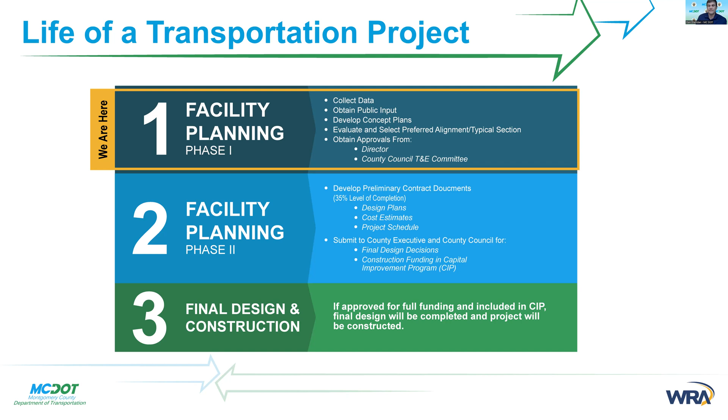We will present the following outline tonight, which includes project limits, project overview, purpose and need, and we will present conceptual design for the following three alternatives.

Alternative 1 is no build, no improvement to the old Columbia Pike and Prosperity Drive. Alternative 2 is improving intersections within the project limits, as well as adding sidewalk and side path along the road. Alternative 3 is intersection improvement, adding new sidewalk and side path, and opening the existing bridge to traffic.

Then we will talk about the project schedule, and lastly, we will finish with the question and answer session. Next slide, please.

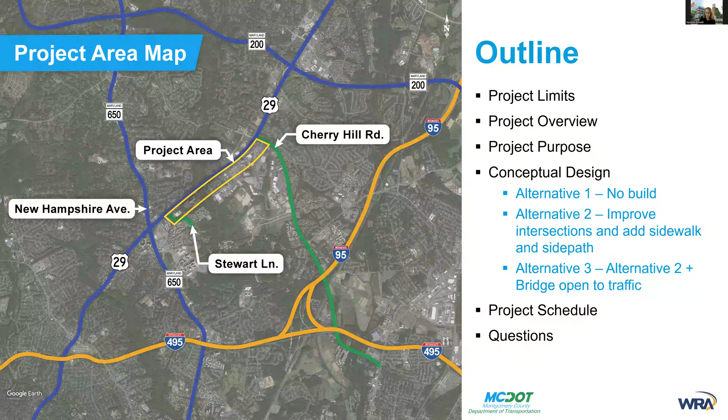Vicinity map. In this slide, highlighted in yellow shows Old Columbia Pike Prosperity Drive. The southern limit of the project starts from the intersection of Stewart Lane and Old Columbia Pike, and the northern limit intersects with Cherry Hill Road. Highlighted in blue is the existing arch bridge over the Paint Branch. We will discuss more about the bridge later in the presentation.

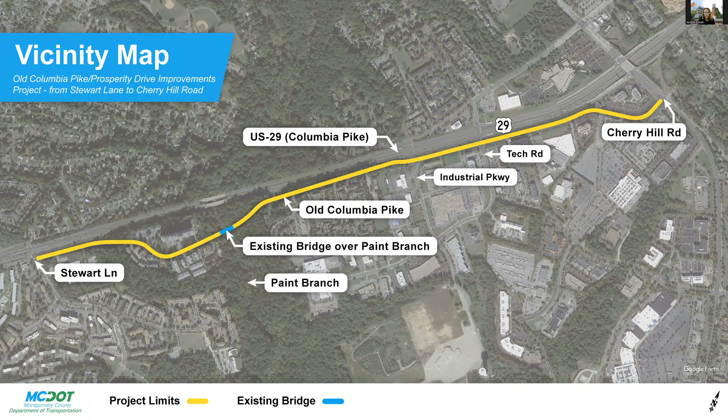Project overview background. Old Columbia Pike Prosperity Drive is about 1.8 miles long. The road from Stewart Lane to Tech Road is called Old Columbia Pike, and from Tech Road to Cherry Hill Road is called Prosperity Drive. There is an existing bridge over the Paint Branch.

There are 4 major intersections within the limit of the project. Beginning at the southern limit and traveling north, these intersections are Stewart Lane, Industrial Parkway, Tech Road, and Cherry Hill Road. This project is being closely coordinated with SHA's current intersection improvement project at US 29 and Stewart Lane, and it has been included in two master plans: the 1997 Fairland Master Plan and 2014 White Oak Science Gateway Master Plan.

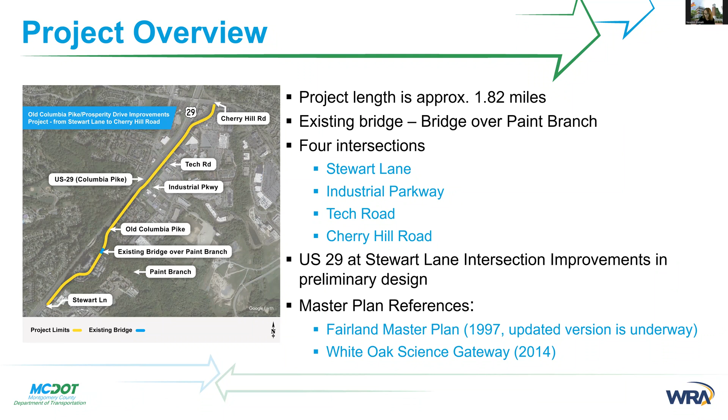So next up, project purpose. During facility planning phase 1, one really important item that we develop is what is the project's purpose. We can see a lot of items here. The two key ones that we've identified are connectivity and safety along the corridor.

Connectivity, because as you know, the bridge over Paint Branch is only open to pedestrians and bicyclists. As we heard earlier, and we'll see more of later, one of the options would be to reopen that to vehicular traffic. But even regardless of that, better connectivity for pedestrians and bicyclists is a big part of this study. Safety is another aspect.

Some of the intersections, for instance Industrial Parkway and Tech Road, are quite in close proximity to US 29. So we're definitely looking at safety concerns at those locations and elsewhere on the corridor. And then you can see the other items here.

We've talked about installing a side path, addressing drainage issues within the project limits, looking at existing traffic patterns, operations, and geometric deficiencies. We're also looking to enhance safety for pedestrians and bicyclists in keeping with the Montgomery County Vision Zero Action Plan, which is a plan to bring fatalities and injuries from vehicular, pedestrian, bicyclist incidents to zero.

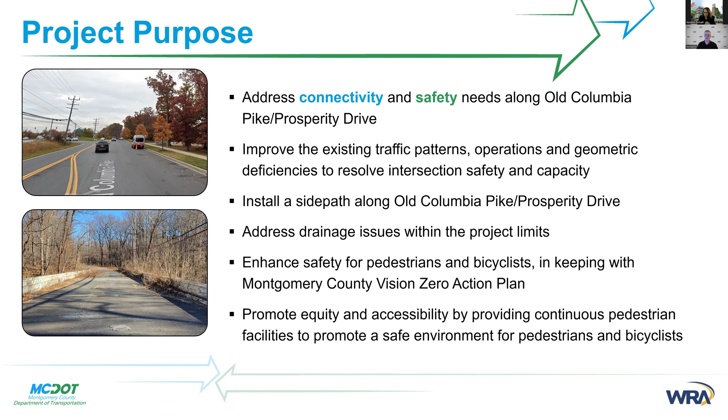A key aspect of this job is the existing bridge over Paint Branch. It's 200 feet long and 27 feet wide. It was actually built back in 1912, widened in 1930, and rehabilitated in 1973. It's registered on the Maryland Historical Trust and is eligible for the National Register of Historic Places. As you know, it's only open to pedestrians and bicyclists at this time.

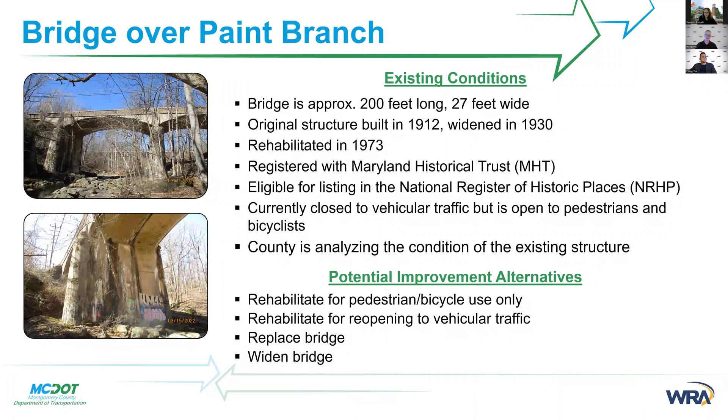As part of this study, the county is analyzing the condition of this existing structure. Potential improvements for the structure itself would be to rehabilitate it but keep it as pedestrian and bicycle use only, to rehabilitate the bridge and open it to vehicular traffic while still having pedestrian and bicycle traffic, or to replace the bridge, or to widen the existing bridge. So those are some of the alternatives that we are looking at.

So next up, Ching will be talking about the concepts for the project. The first alternative is the no-build option. There won't be any improvements along Old Columbia Pike and Prosperity Drive.

There will only be safety and maintenance work on the bridge. The bridge will remain closed to vehicle traffic and will remain open to pedestrians and bicyclists. There will be coordination with SHA on the Stewart Lane intersection improvement project.

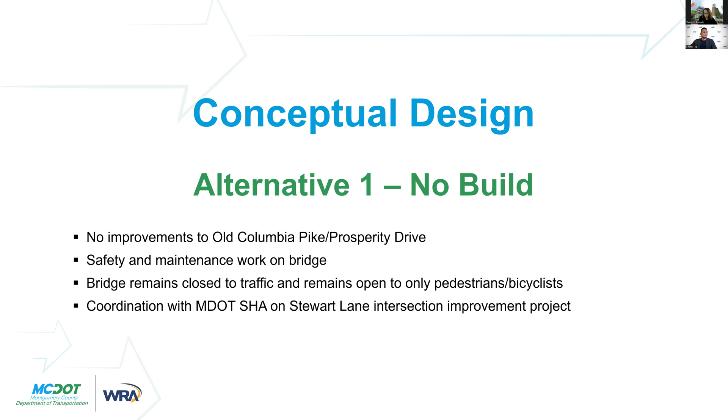Alternative 2 is to improve intersections along the corridor and add sidewalk and side paths. Old Columbia Pike and Prosperity Drive will remain a two-way, one lane in each direction traffic pattern, and we'll install pedestrian and bicyclist improvements, improving intersections. The bridge will remain closed to vehicle traffic, but remain open to pedestrians and bicyclists.

So what are the proposed pedestrian, bicyclist, and intersection improvements? As you can see here, the proposed width for the sidewalk and side path are compliant with the Montgomery County Complete Streets Guideline.

For the sidewalk, it'll be a minimum 6-foot wide concrete sidewalk with a 5 to 6 foot wide grass buffer. As for side path, it's going to be a 10-foot wide side path with a 5 to 6 foot wide grass buffer. The side path will be shared between bicyclists, pedestrians, and personal electric vehicles such as e-scooters.

As for intersection improvements, we're looking to upgrade them to be ADA compliant, with ADA compliant pedestrian crosswalks and curb ramps at all driveways and intersections, and also geometry improvements to address some of the existing safety concerns and improve traffic operations.

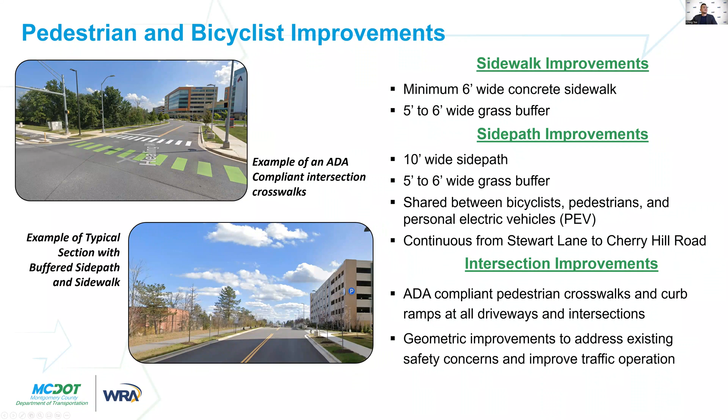From Stewart Lane to Industrial Parkway, it will be designed according to a neighborhood connector. What is a neighborhood connector? It is a residential through street, an important connection for motor vehicles, but also has a strong need to accommodate and encourage pedestrian and bicycle activity. These streets often have bus stops and are key routes in the transit network.

The target speed will be 25 miles an hour. The lane width will be 10.5 feet wide for the outside travel lane and 10 feet wide for the inside through/left turn lane, with a 6 foot wide sidewalk and 10 foot wide side path. This is an example of what it may look like.

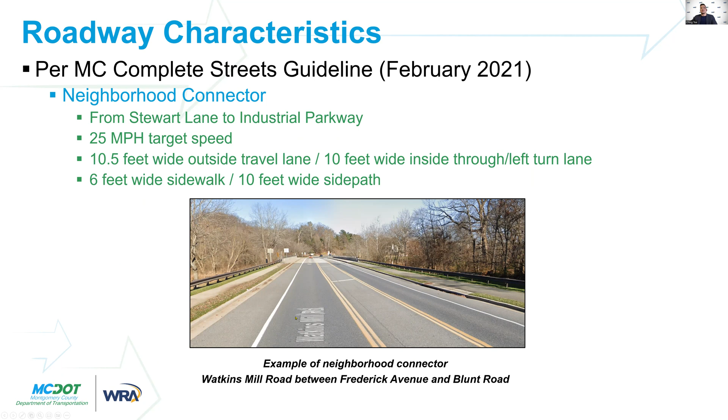From Industrial Parkway all the way to Cherry Hill Road, it'll be a town center street. Town center streets are located in areas planned to have small and medium-sized businesses, restaurants, civic buildings, or residents. These streets have significant pedestrian and bicycle activity and typically offer on-street parallel parking.

The target speed will be 25 miles an hour. The lane width is 11 feet wide for the outside travel lane and 10 feet wide for the inside through and left turn lane. You'll have a 10 foot wide sidewalk and 10 foot wide side path. The picture shown is an example of a town center street.

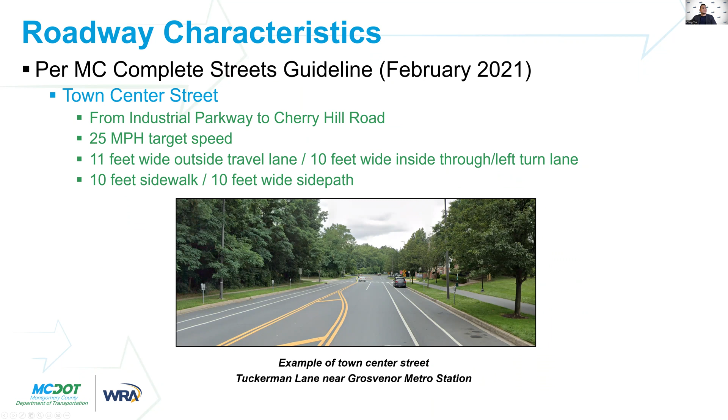So this is the Alternative 2 concept that we developed, starting from Stewart Lane, showing from Stewart Lane to Treetop View Terrace. Parking will be provided on the east side of Old Columbia Pike with curb ramp and curb bump out proposed. That will help with safety because it'll discourage people parking too close to the driveway and intersections.

As you can see here, it shows the concept from the project that SHA is currently developing. It's under concept design right now, which is another project itself. So Old Columbia Pike will be maintained as 2-lane, 2-way, and the side path will be on the east side as shown in the typical section and on the plan view.

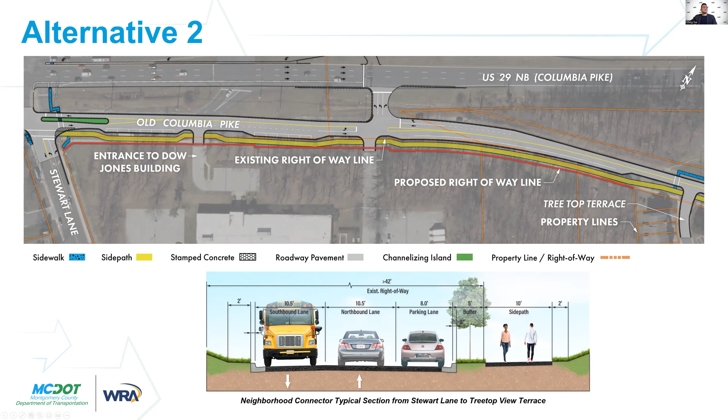Continuing here, there's still going to be sidewalk on the west side. We didn't have sidewalk previously because it was too close to US 29. The side path will be on the east side, running continuously from Stewart Lane all the way to Cherry Hill Road.

As you can see here, parking will be provided on the east side with curb bump outs as well. Old Columbia Pike for vehicles will terminate at Carriage House Drive, just south of the bridge, and then there'll be a sidewalk connection and side path that will continue going north.

As you can see in the typical section, there's going to be a 6 foot wide sidewalk with a 6 foot wide buffer, then 10.5 foot lanes northbound and southbound, then an 8 foot wide parking lane, a 5 foot wide buffer, and a 10 foot wide side path.

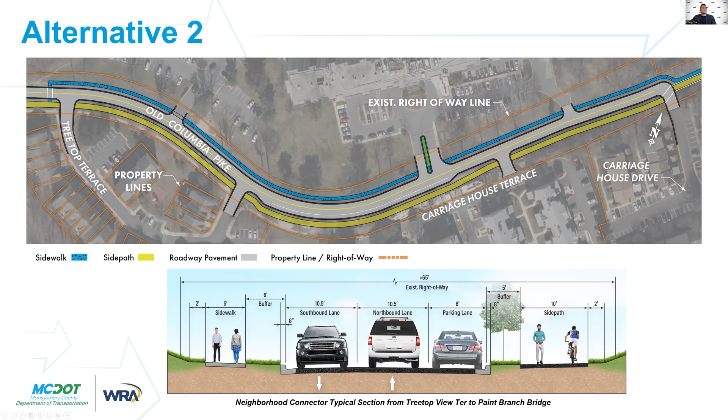Continuing through the existing bridge, as previously discussed, it will only be open to pedestrians and bicyclists to cross over, continuing to use the existing pavement that's out there, which we can delineate with pavement marking for sidewalk and side path, as you can see on the typical section here. You will continue going north at the last entrance, beginning at Old Columbia Pike, going north.

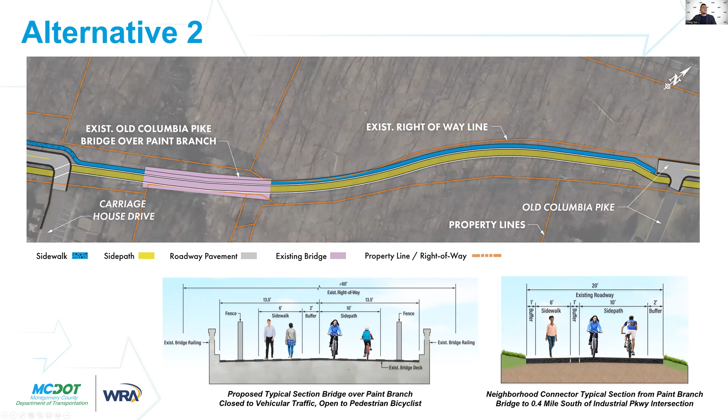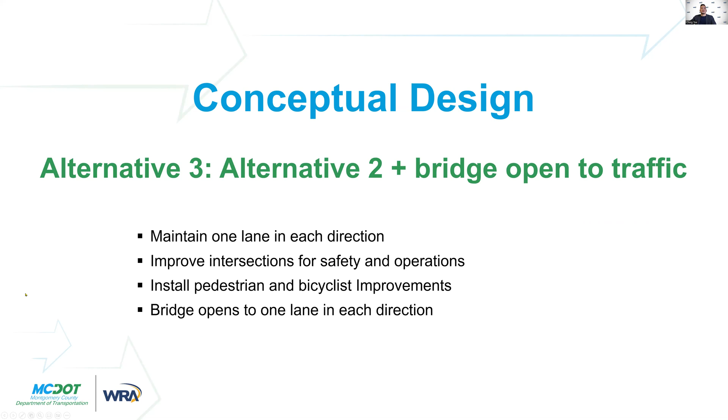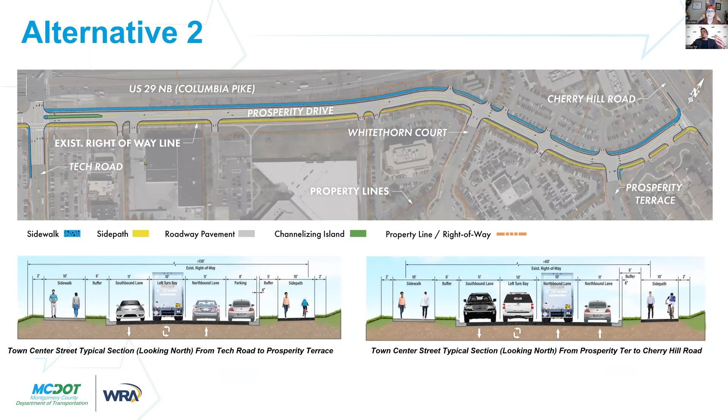Did one of you want to explain the safety at the crossing? I can explain, I don't know if you're still looking at the screen. So understanding this is still a work in progress, I just want to point out some proposed features that will improve on pedestrian and bicycle safety.

Aside from the dedicated side path that pedestrians and bicyclists can walk and bike on, separated from vehicle traffic, we have channelizing islands to reduce crossing distance for pedestrians when they cross the street. We have ADA compliant curb ramps proposed for people on wheelchairs so they can safely navigate across, and there's appropriate pavement marking to delineate where the crossings are, along with signs.

And also, when this project moves forward, we will be compliant with Montgomery County's protected intersection concept, which tries to reduce the length needed to cross the street for pedestrians, meaning they are less exposed to traffic when they cross.

For example, at the intersection here, you have a stamped concrete surface, which is like a mountable curb, a 3-inch elevated surface where cars turning right can use the tighter radius. But it also allows for, let's say, a delivery truck that needs to turn right to do so as well, though most of the time cars will use the tighter radius.

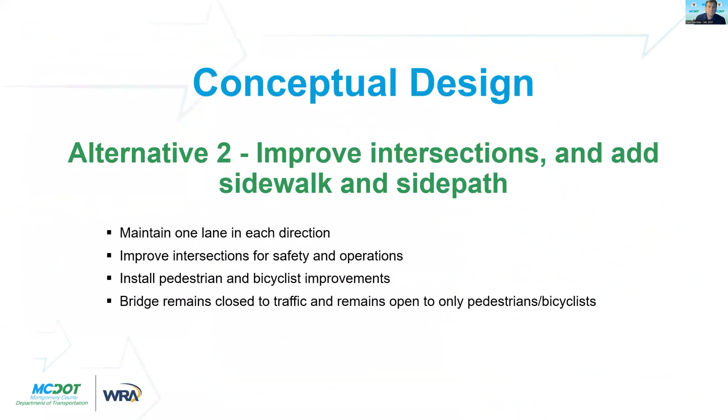Similarly, along the north side at Cherry Hill Road, where the project ends, there's an existing shared use path that parallels the east side of US 29 for about a quarter mile, and it dead ends right by Manor Care Nursing Home. If the county at a future time could look at extending that path along 29 to Fairland Road, that would extend the usefulness of this facility as well.

So thank you for those suggestions. I will say the county does have a couple other CIPs where those can be accomplished. One of them is looking to improve pedestrian bicycle connections along the Flash corridor, which is along US 29. So we can take those suggestions back to that group and see if they can be accomplished.

And finally, I'd like to thank the team for the presentation and its thoughtfulness on this project. It would be a great addition for the community, just as long as the bridge is not open to motor vehicle traffic. Those were my comments.